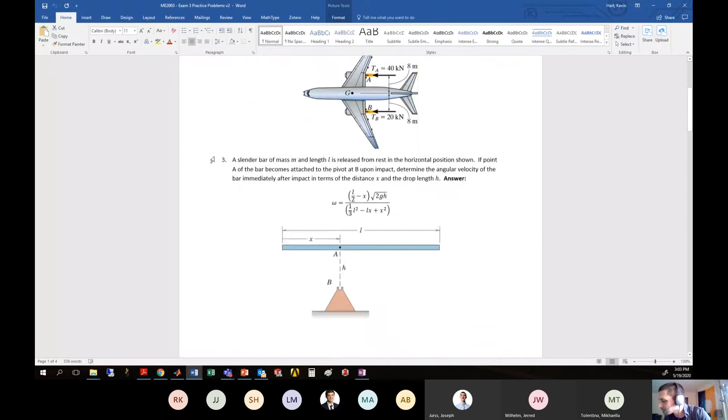All right, away we go with our practice problems. So as a reminder, I did post these practice problems to Blackboard, and it's a document that looks something like this. All right, your exam 3 practice problems. There's a couple problems on impulse and momentum, 2 on impact here, and then a couple on linkages and a couple on gearing systems. So you can kind of go through all these as a sort of refresher.

I want to start with a very simple problem on impulse and momentum. We'll start here with number 1. Just want to remind you about radius of gyration, and remind you of some of the things that we talked about for conservation of momentum.

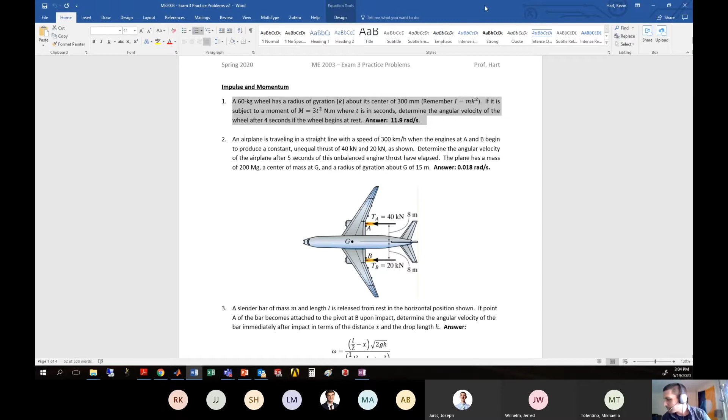I wonder if I could just copy and paste this right to my board here. I don't even know. Can I copy and paste right to OneNote? I guess we're gonna find out. Ready? Moment of truth. Yeah. What? That's not where I wanted to go. Stupid technology and whatnot. Oh, baby. All right, how about that? Can you deal with that? Wish I could make the text a little bit bigger. Can I do that? Oh, I can. Look at that. Dang. They didn't give me a PhD for nothing, I tell you what. All right.

So here we go. We got a 60 kilogram wheel, radius of gyration, here I give the variable little k, about its center, 300 millimeters. Remember that radius of gyration is related to mass moment of inertia with this I equals m k squared. It's part of the reason I want to go through this problem.

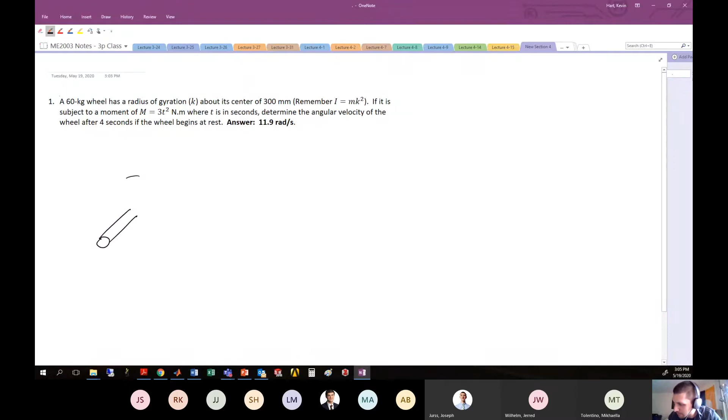If it's subject to a time-changing moment, 3t squared newton meters, where t is in seconds, determine the angular velocity of the wheel after 4 seconds if the wheel begins at rest. All right. So kind of the picture you should have in your mind: you've got this wheel on a rotating shaft. Pictionary skills still subpar.

All right. You got this sort of wheel on a rotating shaft, and it's moving around here with some moment that is 3t squared. The mass of this guy is 60 kilograms. And we're told the radius of gyration, this K, is 300 millimeters. Hopefully you talked about radius of gyration in your 2002 class.

Briefly, I will mention that radius of gyration is a physical interpretation of where you would have to put all the mass of an object at a distance away from a rotating axis to give you the same mass moment of inertia. If that means nothing to you, don't worry about it. Just understand that the relationship here is I is mk squared.

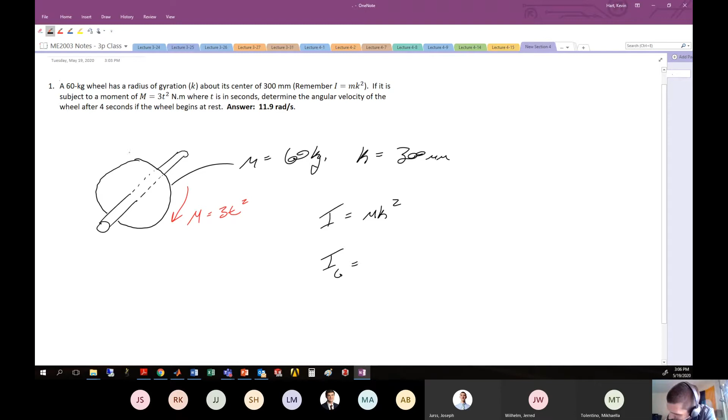So if that's the situation, I is mk squared, then here the mass moment of inertia of this particular disk spinning around this axis is equal to 60 kilograms times the radius of gyration, in meters, 0.3 meters squared. I did that conversion in my head. Thank you very much. And then your mass moment of inertia here, 5.4 kilogram meters squared.

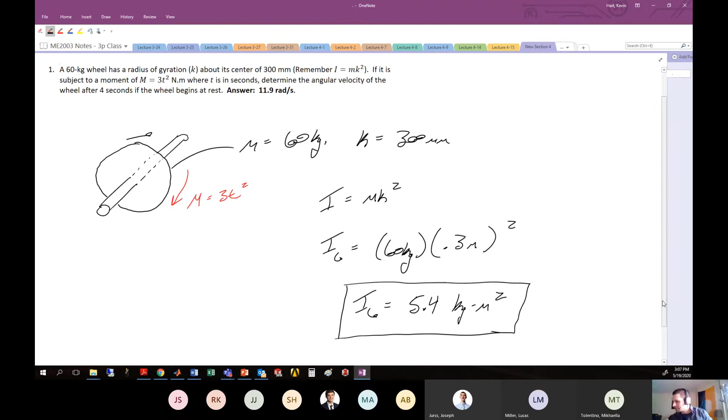Don't forget your units. Units. 5.4 football fields. Rawr.

All right, 5.4 kilogram meters squared. So there's your mass moment of inertia. And why is that important for this problem? Well, this is a conservation of momentum problem. So let's jog our memories and we'll do conservation of momentum.

Remember, our conservation of momentum equation looks something like the summation of the angular momentum of the object in state number 1 plus the integral of the moment impulses applied over time equals the summation of the angular momentums of that object in state number 2. This is our general conservation of momentum equation. Must be done about a fixed point or about the center of gravity. And don't you forget it.

So we're told that this thing starts from rest. You could make a diagram here if you want. I'm not going to make the diagram, I already made the picture. It's not really that complicated of a problem. So it starts from rest, so it's not spinning with any angular motion about this axis to start with. So we have no initial angular momentum.

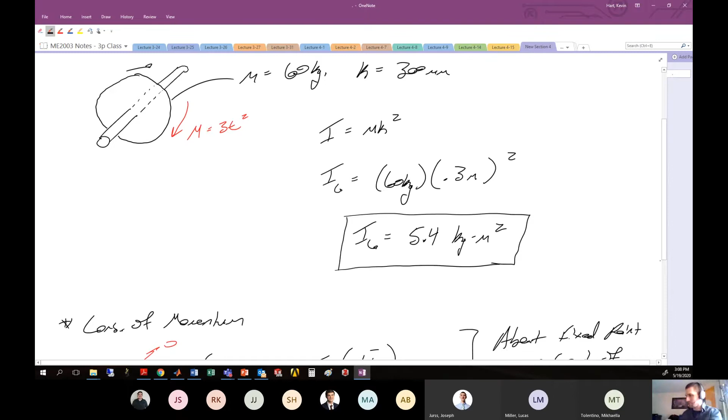Here the term, the integral of the moment dt, is the integral of the moment which we're given as a function of time. So this is our impulsive moment, given in terms of time. Maybe this is some flywheel being spun up by some motor, where it takes a little bit of time to get going. So let's say this is 3t squared. It starts from rest at time t0, and we're interested in what happens after 4 seconds. So our limits are 0 to 4 seconds, integrating over time dt.

This is going to be equal to the angular momentum of my flywheel in condition number 2, which from the definition of angular momentum is simply I_G omega, or call this omega 2, because it's the angular velocity in condition number 2, that's fine. I'm just going to leave it as omega. Let's perform this integration. So easy a caveman could do it.

You're going to end up with something like t cubed from bounds of 0 to 4 equals, I already calculated my mass moment of inertia, 5.4 kilogram meters squared, times my angular velocity omega. 4 to the third power is 64, equals 5.4 times omega. End up here with omega equal to 11.9 radians per second. So there you go. Brush your shoulders off.

Just getting you reacquainted with conservation of angular momentum, right? So that's your reintroduction, talking a little bit about your radius of gyration, just so that doesn't escape your memory, and getting you back on track with conservation of momentum. So that was sort of a little warm up, our little jaunt around the field. Now we're ready to play the game.

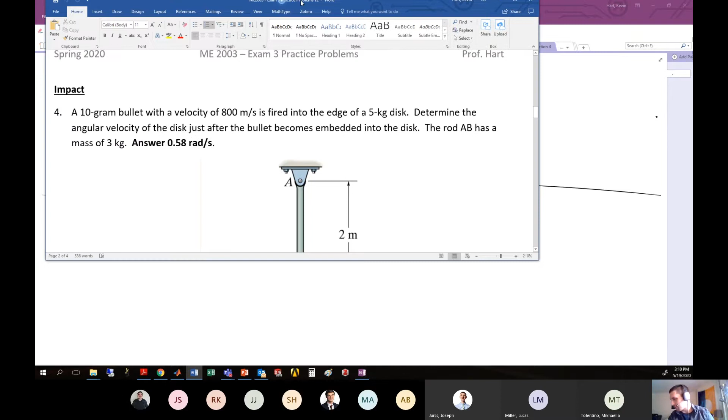And when we play the game, we're going to move on to a more complicated problem, probably the most complicated problem in this discussion about impulse and momentum. This is the problem with the pendulum, and a bullet is striking this pendulum. It's particularly complicated because you have multiple components: the rod, the disc, and this bullet that's hitting it and sticking to the pendulum.

How do we deal with that? So I particularly like this problem. There's a lot here. There's a lot of aspects, and it's just good to sort of brush off the shoulders and go through this problem, okay?

So you got a 10-gram bullet, velocity of 800 meters per second, fired into the edge of a 5-kilogram disc. Determine the angular velocity of the disc just after the bullet becomes embedded into the disc. So the bullet embeds into the disc. This is important. It does not rebound off. It becomes one with the disc in a very Buddhist type way. Become one with the disc.

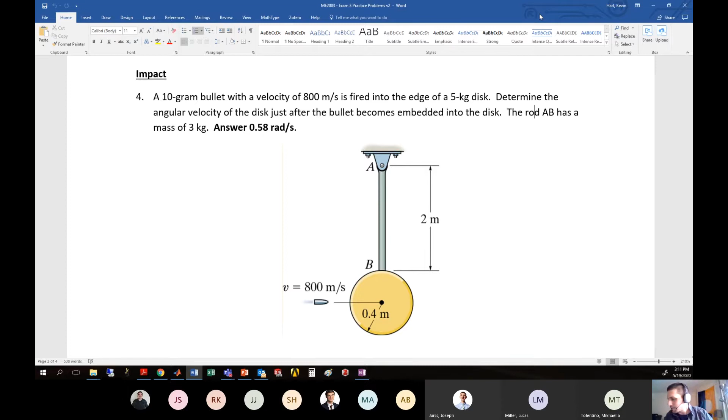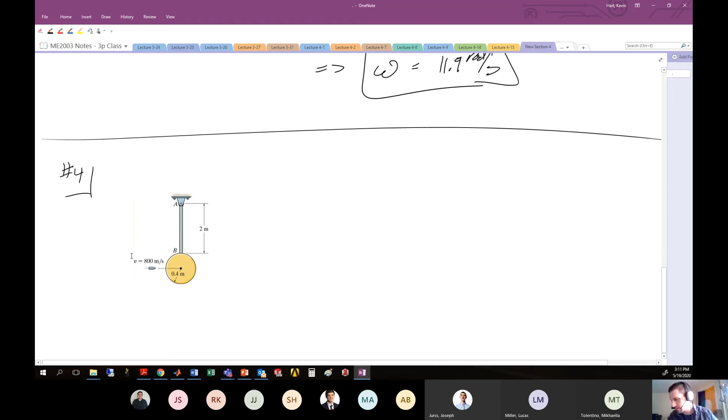All right. The rod AB has a mass of 3 kilograms. All right. So let's go through this problem. I'm going to copy the picture over, and I'll copy the relevant information over to the screen here. So this is problem number 4 from review. And let me copy this image over here. All right. A couple of things that we're told. This guy has the mass of the disc. I'll call M sub D is equal to 5 kilograms.

All right. Mass of the bullet, I'll say, is M little b. Here is 10 grams, which is 0.01 kilograms. Again, did that conversion in my head.

I know you're proud of me. Grams to kilograms, that's easy. Feet to yards, feet to miles, no thank you.

Mass of the rod here, this guy we're told is 3 kilograms, and starts at rest. And the velocity of the bullet coming in, obviously, is given, so I'll say that this is V sub B, 800 meters per second. All right, I think that's about all we really have as given information. We want to find omega right after bullet embeds.

Does embed have 1D or 2? The world will never know.

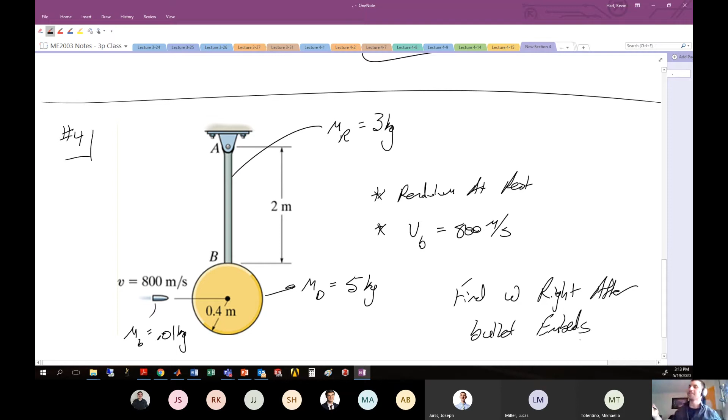Okay, so let's remind ourselves with conservation of momentum problems, if we're doing conservation of angular momentum, we can either do our analysis about a fixed point or about the center of gravity. Let's hold off just a second and make that decision after we do our impulse momentum diagrams. So remember, conservation of angular momentum, you'll want to do an impulse momentum diagram, so let's do that first.

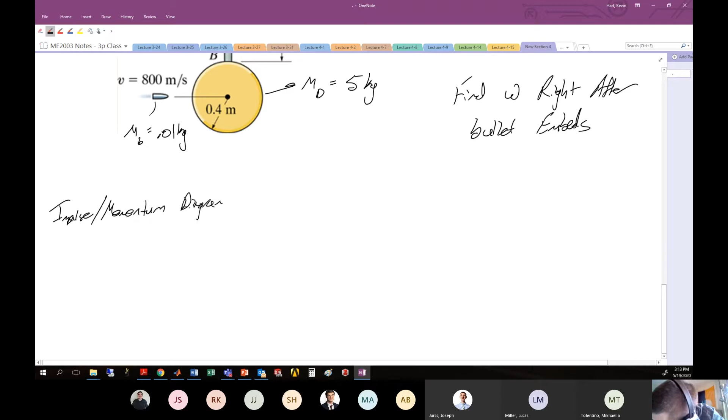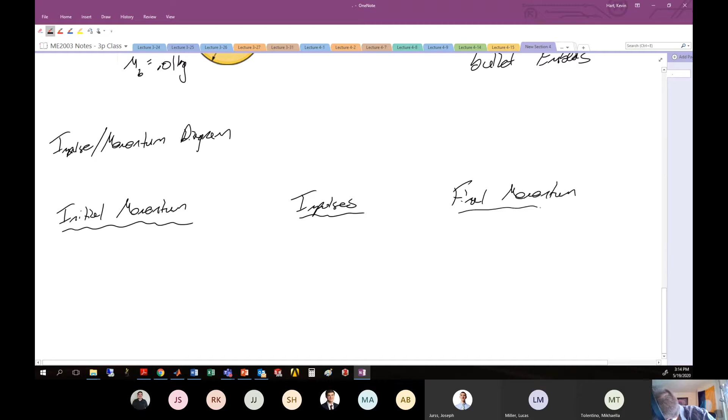All right, these impulse momentum diagrams, you've got some initial momentum, the impulses that occur, and the final momentum. So here we have initial momentum. We've got the impulses. And we have the final momentum. Bam. All right. Again, put my Pictionary skills to the test.

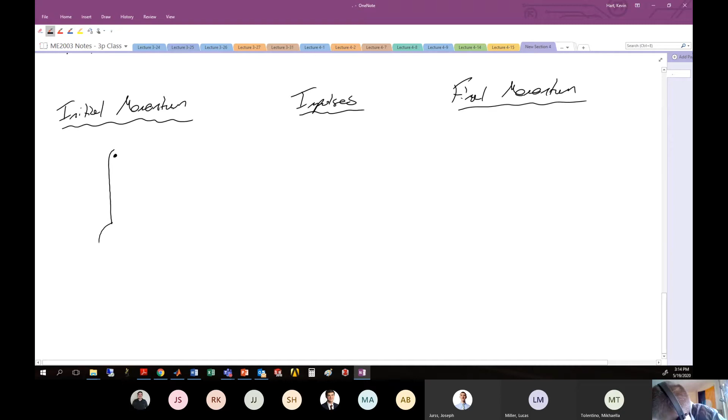All right, so here's point A kind of at the top, and we've got this slender rod and then a disc kind of at the bottom, all the way back up. Bullet coming in on the left-hand side here, about to strike this disc. The bullet coming in, that's going to have a linear momentum, which looks like mass of the bullet, velocity of the bullet, state number 1. So this is MB_VB1. That's really the only momentum we have in state number 1. It's just the bullet about to strike this pendulum because the pendulum's at rest, right?

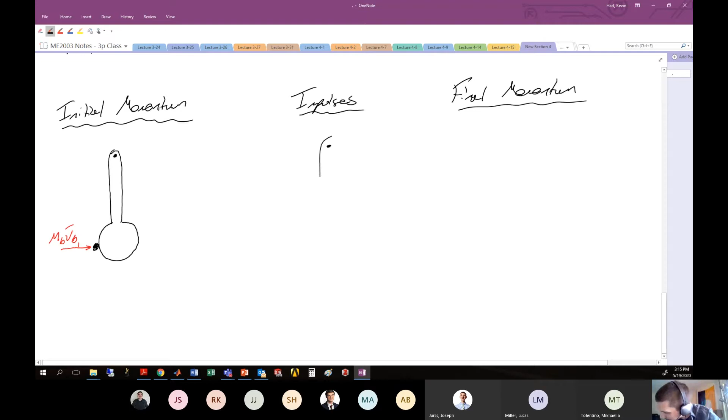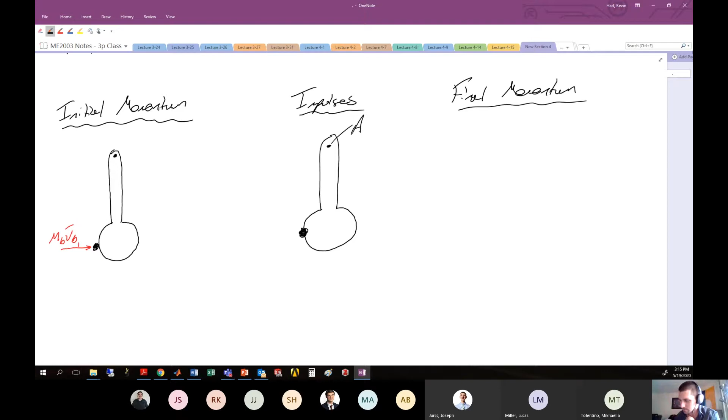Next, we have to look at our impulses which are occurring. Okay, our impulses, again, we have up here, this is point A. And again, the bullet now kind of embeds or gets stuck in the side of this particular pendulum. So what happens in this situation is the bullet is striking the disc kind of at the bottom, but it's becoming embedded. So whatever forces are transferred between the bullet and the disc are not external forces. They're internal to the system. So we do not have to draw them as impulses on this particular part of the problem because the forces that are transferred are internal to the system.

All we really have to concern ourselves with is the impulses that happen here at point A when we separate the pin. So we have a force here at A in the x direction, and we have an impulsive force here at A in the y direction. And those really are the only impulsive forces that are of any importance in this particular part of the problem.

All right. Now, final momentum, this is where it gets cray-cray. All right, this is where it gets crazy. Crazy like a fox. All right, so this guy has got a lot of craziness going on.

At this point, the bullet is embedded, and the rod, the disc, and the bullet all now have fixed axis rotation about point A up here. The rod has fixed axis rotation about A, the disc has fixed axis rotation about A because it's attached to the rod, and the bullet now, which is attached to the disc and the rod, has also got some motion about point A. So all three of these objects, the bullet, the disc, and the rod, all have fixed axis rotation about A.

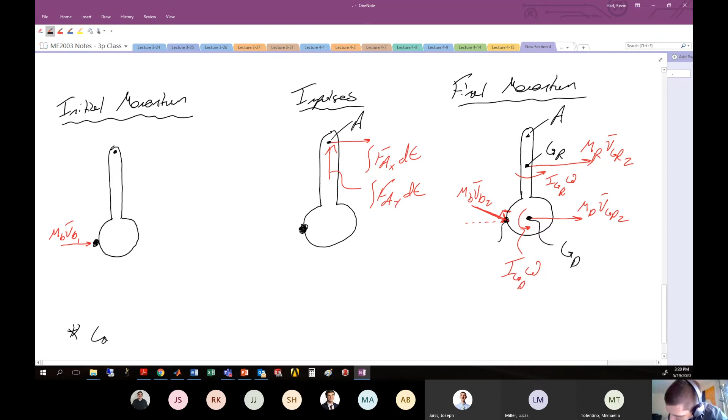Angular momentum associated with linear motion of the rod, linear motion of the disk, linear motion of the bullet, angular motion of the rod, and angular motion of the disk. Yikes town. A lot of crap. But you can do it. We can tackle it. Can do conservation of momentum about either a fixed point or center of gravity.

All right. Let's make an intelligent choice here about which point we would like to select to do our conservation of angular momentum. If I wanted to do it, let's say, about the center of gravity, I would have to find the center of gravity. Okay, I got a disc, I got a rod, and I got a bullet. I'd have to do some centroid location to figure out where the center of gravity of this complex assembly is. I'm lazy, okay? I don't want to do that. I'm old. Leave me alone.

I would much rather do my analysis about a fixed point, all right? I don't have to figure out where the center of gravity is if I do my analysis about the fixed point. It makes my life easy. So the only fixed point we have here is the fixed point at the top of the pendulum, about which all of these points are spinning around. So let's go with that point.

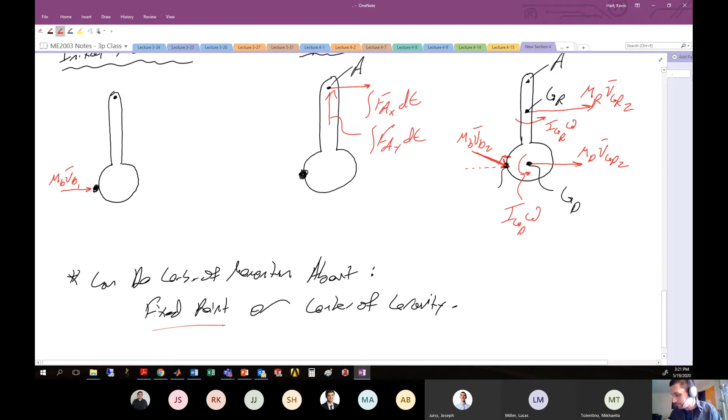All right, so we'll do it about A. All right, away we go. General equation: summation of the angular momentum about point A, state number 1, plus the moments integrated over time, equal angular momentum about point A, state number 2. Let's be clear, these are moments about point A. All right.

Away we go. Angular momentum about A in state number 1. Well, the only thing I really have to concern myself with in condition number 1 is the impending doom of this bullet. Doom of that particular guy.

All right, that guy is, why does he keep jumping over there? I never really figured that out.

All right, so this guy has a line of action that's purely horizontal. You can hopefully sort of see the line of action of the linear motion of this particular bullet. So if I'm interested in point A up here, and I want the angular momentum about point A, I want something like this position vector, which is the position vector R, which locates the bullet from A there, crossed with this component of the linear velocity.

So if I write that out directly, I have to concern myself with the position vector which locates B from A, crossed with the mass of the bullet times the velocity of the bullet, state number 1. That's the only real thing I care about in condition number 1, the angular motion associated with the linear motion of this bullet. Now, my impulses.

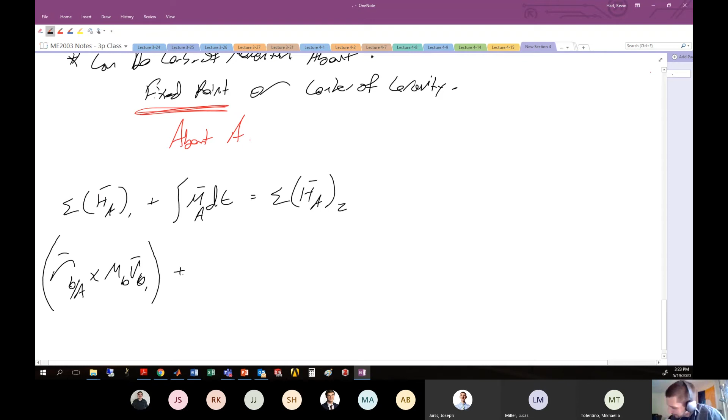Here, when cutting away the pin, we're going to have impulsive forces at the pin in the X and the Y directions. But since both of those travel right through point A, there's no moment arm to those forces, so the contribution to the impulsive moments from those forces is 0. So we don't have any impulsive moments we have to care about. It's a strategic pick to do our conservation of momentum about A. Very strategic. I'm the strategicist.

Now, complications when we go to angular momentum about point A in state number 2, because we got 1, 2, 3, 4, 5 guys that we got to worry about.

Just like my favorite burger chain, Five Guys. I'm just kidding. It's not my favorite burger chain. My favorite burger chain is McDonald's. Just kidding. Kind of.

Let's do the easy ones first. We have the angular momentum of the disc and the angular momentum of the rod. Those are pretty easy. So here we're going to have something like, I'm going to try to be consistent with my notes here, mass moment of inertia at the center of gravity of the rod times the angular velocity. Here I'm just going to say angular velocity is one variable, because since everything's stuck together, everything has the same angular velocity. Okay, plus

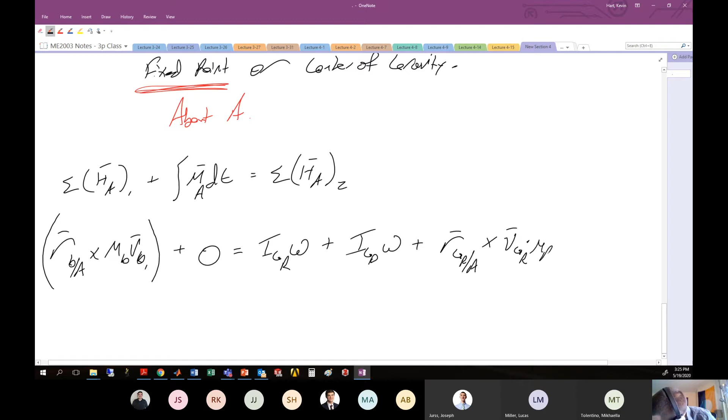So here we have the position vector which locates the center of gravity of the rod from A, crossed with the velocity at the center of gravity of the rod times the mass of the rod. I'm going to add to that a similar looking term for the disk. Here's our linear velocity of the disk. Position vector which locates the center of gravity of the disk from point A, crossed with the mass of the disk times the velocity of the disk in condition number 2.

Try to keep my nomenclature the same. Mass of the rod, velocity at the center of gravity of the rod, state 2. Oh, so many variables. All right. Plus the position vector which locates the bullet from A, crossed with the mass of the bullet times the velocity of the bullet, state number 2. So there you go. Here's your full generic general equation.

Now, because the bullet and the rod and the disk are all connected together, we have kinematic relationships. Kinematics, rawr. That is, the velocity magnitude at the center of gravity of the rod in state number 2 is simply equal to the magnitude of the position vector which locates the center of gravity of the rod from point A, multiplied by the angular velocity omega. V equals R omega, where this is kind of a bad G here.

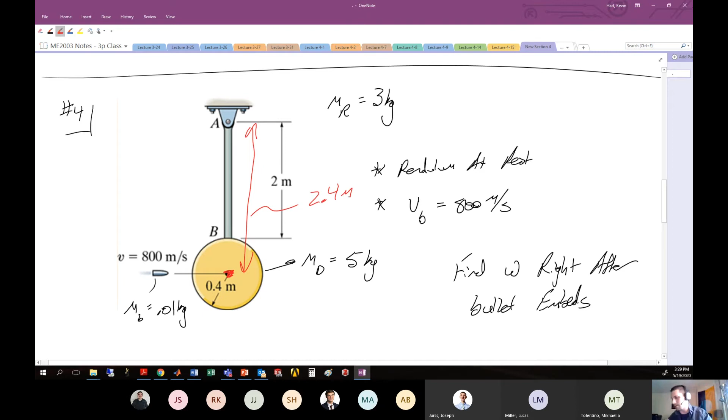Conservation of energy. We've done this before. Conservation of momentum. Get the general idea. You'll have similar looking velocity at the center of gravity of the disk. State number 2 is equal to the length to the center of gravity of the disk from A multiplied by the angular velocity. Okay, so here we're going to have the magnitude of the velocity at the center of gravity of the disk, condition number 2, is equal to the distance between the center of gravity of the disk and point A. Okay, well, here's the center of gravity of the disk here. So this total length is 2.4 meters. Okay, so the length of the rod plus the radius of the disk get me 2.4 meters. Right. So my kinematic relationship here, 2.4 meters times omega.

Last one, magnitude of the velocity of the bullet, state number 2, is equal to the position vector which locates the bullet from A, magnitude, multiplied by angular velocity. This one's tricky. All right. So the magnitude of the velocity of the bullet, state 2, is equal to the length of the vector which locates the bullet from point A. Okay. So that is this vector here. I've sort of drawn it before. That's this guy here, right? Which you will see has got a magnitude which is something like square root 2.4 squared plus 0.4 squared, right? We're relying on the right triangle here to get us that information, right? So 2.4 down, 0.4 to the left. That gets me the magnitude of the vector which locates the bullet from point A using Pythagorean theorem, square root 2.4 squared plus 0.4 squared.

All right. Are you guys scared of the squared? You're scared of the squared. Don't be scared of the squared. Can you spare a square? All right, there you go.

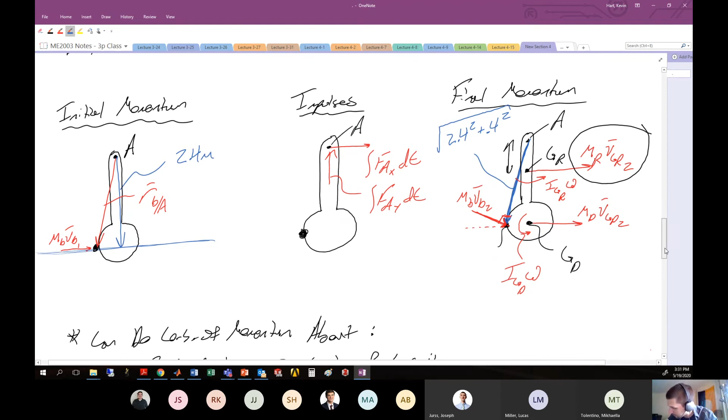Now, with all our kinematics in place, we're ready. Back to this guy here. We go back to this guy. All right, so finally. Here we go, this particular term here. Position vector which locates the bullet from A crossed with the mass of the bullet times the velocity of the bullet in condition number 1. All right, so we're looking at the contribution here. The distance to the line of action between A and my linear velocity of the bullet here is 2.4 meters, obviously. Okay, so this term is going to be something like 2.4 meters times the mass of the bullet, 0.01 kilograms, times the velocity of the bullet in condition number 1, given 800 meters per second. That's your first term. That's the angular momentum on the left-hand side.

This is equal to, here I have the angular momentum term associated with the rod. So mass moment of inertia of a rod is 1/12 ml squared. So we are 1/12 the mass of the rod, 3 kilograms, times the length of the rod, 2 meters squared. And don't forget your omega. So here, this is your IG of the rod, omega. All right. Instagram omega. Plus mass moment of inertia of the disk times the angular velocity of the disk. Here we have mass moment of inertia of a disk is 1/2 mr squared. So 1/2 the mass of the disk is 5 kilograms. The radius of the disk is 0.4 meters squared. Don't forget your omega. Instagram omega.

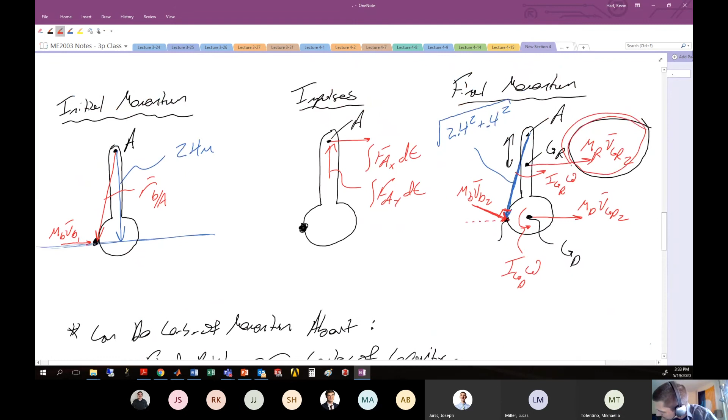Continuing. Now we add the first angular momentum component, which comes from linear motion. So we're going to here add this term, which comes from the linear motion of the center of gravity of the rod. Okay, so the distance between point A and the center of gravity of the rod, that's 1 meter, multiplied by the mass of the rod, which is 3 kilograms, multiplied by the velocity at the center of gravity of the rod, which we're going to write in terms of omega, is 1 meter times omega. All right, and that comes from here. So this is something like R cross MV, right?

All right, next term from the linear motion of the disk. Okay, so from point A to the center of gravity of the disk, that's 2.4 meters, multiplied by the mass of the disk, it's 5 kilograms, multiplied by the velocity at the center of gravity of the disk, which we're going to write in terms of the angular velocity of the disk, 2.4 meters times omega. Okay, so that is this term here.

And then finally, the contribution from the bullet. All right, the distance between point A and the bullet we showed before. This is the square root of 2.4 squared plus 0.4 squared meters. Multiplied by the mass of the bullet, 0.01 kilograms, times the velocity of the bullet, written in terms of the angular velocity of the system, which again has this kinematic relationship that uses the length between A and the bullet, which is 2.4 squared plus 0.4 squared. All this multiplied by omega.

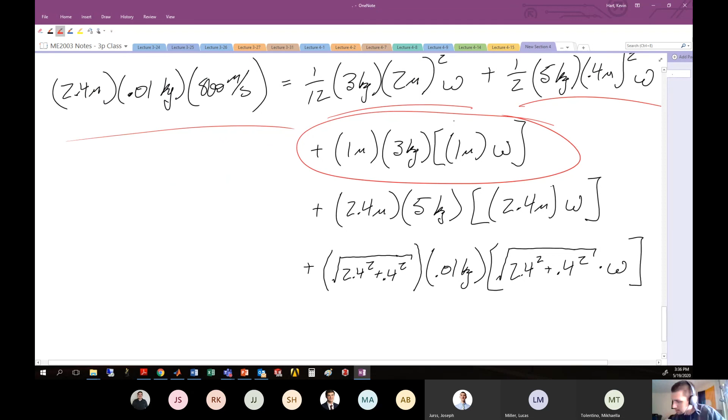We're going to add to that contribution from this guy, which I can do in my head. It's going to be 3 omega.

I like when you multiply by 1. That's easy. What's even more easy is multiplying by 0. So easy. Caveman can do it.

All right. Next, we have the contribution of the linear motion of the disk to angular momentum. Here's our biggest contributor. It is the oil industry of contributions. Oh, God, that's a complicated joke. Right, 28.8 omega. And then the last contribution we have to worry about is all this associated with the contribution of the bullet. And here that contribution is plus 0.06 omega.

So it's nice to just see the relative contributions of each of these guys. Here, this is from Ig omega of the rod. This is from Ig omega of the disk. This here is from R cross mv of the rod. This here is from R cross mv of the disk. This here is from R cross mv of the bullet.

So it's interesting to look at the relative contributions of all of these terms. The one that blows the rest of them away is the contribution that's coming from the linear motion of the disk. That's this guy here. It's 10 times more than that one, which is the next highest. So this is the main contributor. It's the oil industry of the lobbyist group. It's the main contributor. He gets all the attention.

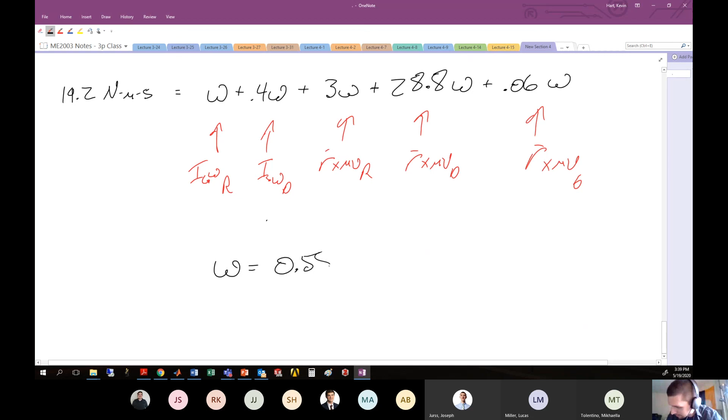Final answer, if you include all contributions of all pieces, looks something like 0.58 radians per second. There you go. There's your conservation of momentum problem. Hopefully that's jogging some memories. You're shaking off the rust. You're understanding these compound terms, angular momentum, linear momentum, how they both contribute to the overall general conservation of momentum of the system.